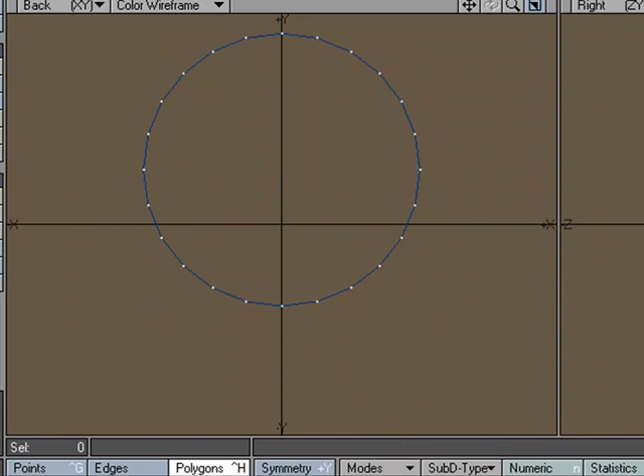I'm going to jump over to Modeler and build the basic building blocks, starting with the disk tool. So over in Create Disc, I'm just going to draw out a circle. I'm not going to give it any kind of depth, it's just going to start off as a circle.

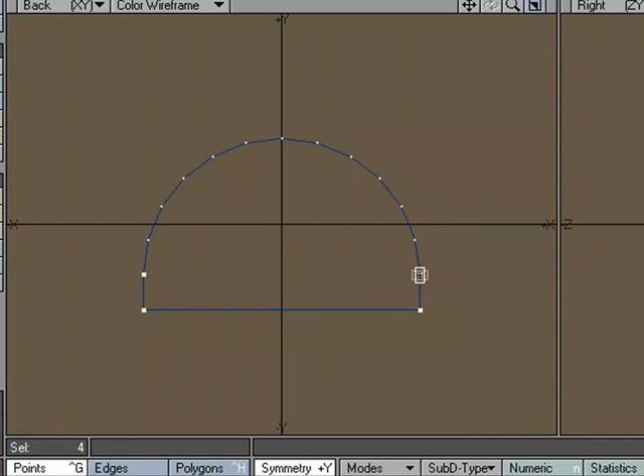I'm going to get rid of some of the points I don't need, down here. Hit delete. I'll go ahead and center it with F2, turn symmetry on, and then select these two points, which of course will be selected over here too. H for stretch, and I'm just going to line those up. I'm using the stretch tool to move these, but by having both selected, I'm stretching them in place. Let's zoom out a little bit and drag those down. So what I get is this nice tall wall and this arch. Just so it'll show up easier in this presentation, I'm going to shorten those a bit.

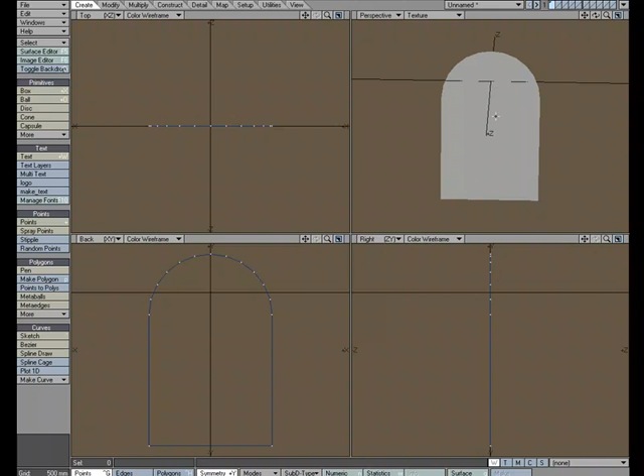So now that we've got our basic shape, we just need to give it some depth. I'm going to go ahead and select the polygon, not that you have to, but just so I can explain. Let's go full screen. When you're extruding, normally you extrude away from the polygon normal so the object isn't inside out, but we actually want our geometry flipped in this case.

So I'm going to go over to Multiply, Extrude, and extrude this out to get a long hallway. Let's take a look at this full screen in perspective, and now as you can see we're kind of in a hallway. There's no reason to build the outside thickness of the walls, we're just focusing on this.

Now I'm going to select this polygon, T for move, hold down Control to constrain it, and make this a little longer. We can always shorten it later. F2 to center, and I'm going to turn symmetry off, select all of the geometry, T for move, and I'm going to copy, paste, and move this over to here.

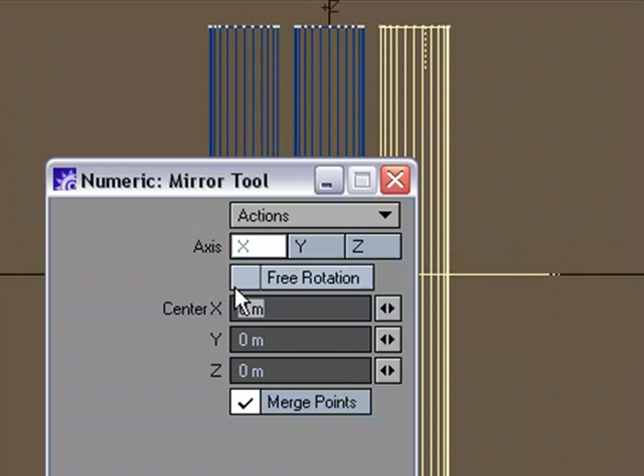Now I could copy and paste and move it over here as well, but to make sure it's the exact same distance, I'm going to use the mirror function, Shift V, N for numeric, and we'll mirror it across the X, with the center at 0, 0, 0. So now I have 3 identical little hallways.

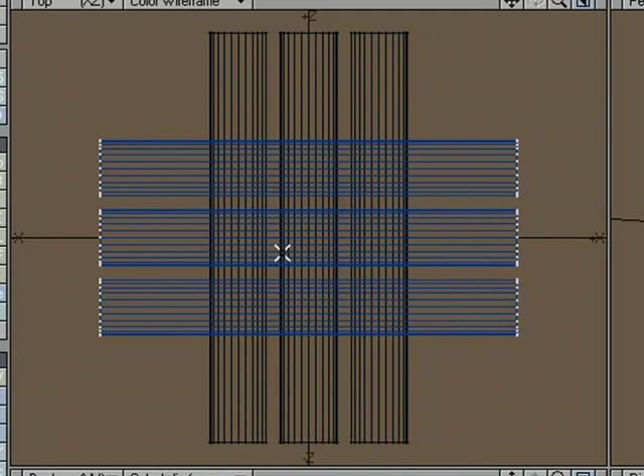I'm going to copy all of them and paste them into layer 2, put layer 1 in the background, and with my cursor right over the top view in the center, I'll hit R to rotate the geometry, then F2 to center it. Let's go full screen. So we've got these 3 hallways intersecting with the 3 hallways in the background.

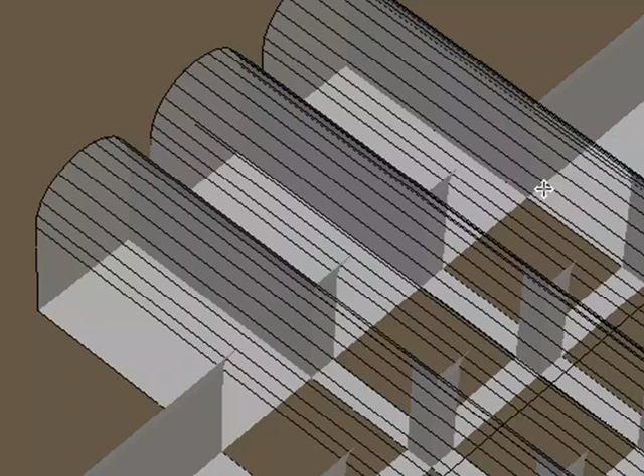Let's Boolean those together, let's merge them together. So Shift B, which is construct Boolean, and we'll use the union operation. Click OK, and let's take a look at what we ended up with. Now we can get rid of the floor polygons. I'm just going to lasso select those, hit delete, and let's take a look at what we've created. So we have the ceilings we were after, with these nice arches here, but let's dress it up a little bit more.

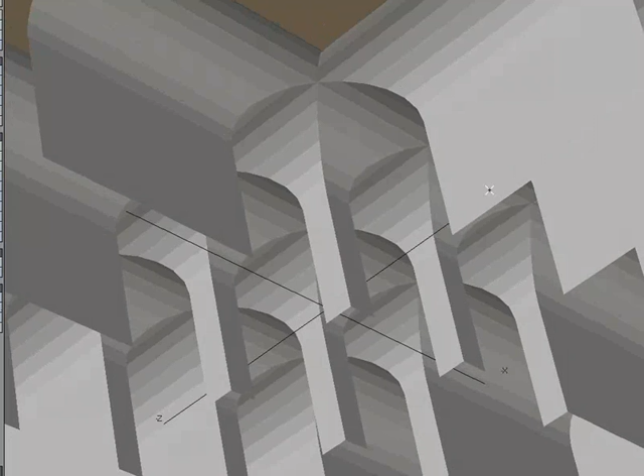Let's make it look a little better. First, we can turn smoothing on. I'm going to hit Q for change surface, and we'll call this stone smoothing, and keep it gray for now. Okay, and what I'm looking at is this really hard edge here. Let me zoom in—it's a really hard edge. I'm not really liking that, and I want to round that off a little bit.

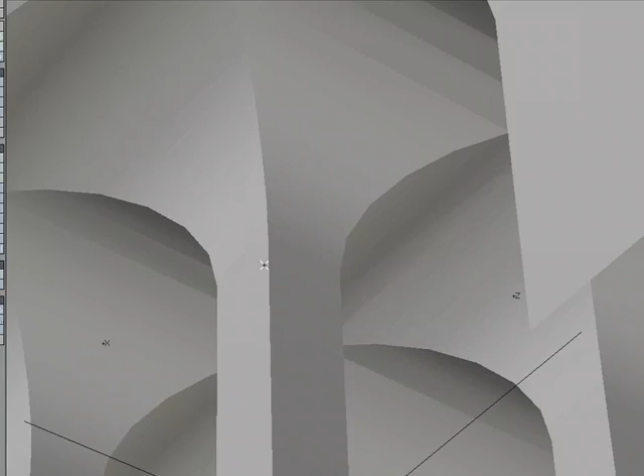So the first thing I need to do is, after I perform a Boolean operation, I really need to take the individual pieces of geometry and merge them together.

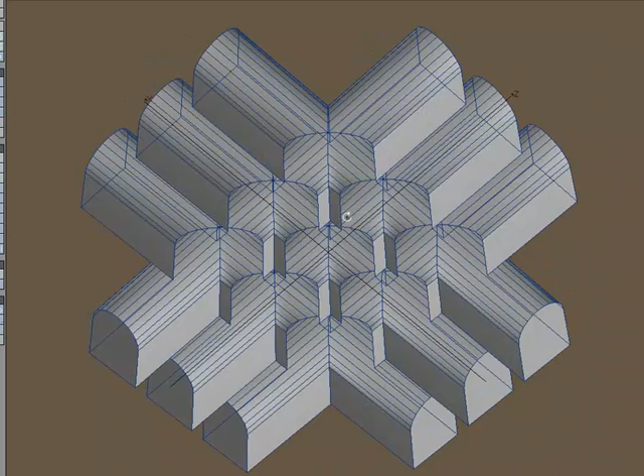I'm going to hit M for merge and get rid of the points that are right on top of each other. Now let's go into texture wireframe just so we can see, because what I want to do is round off these edges.

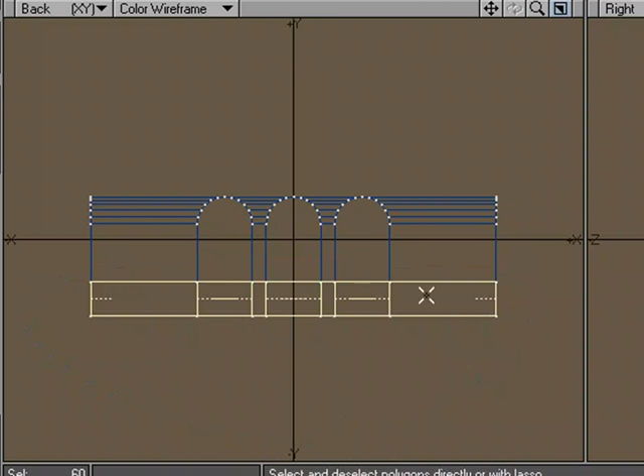One thing I have to know is when you have open edges, like on the bottom of this geometry, Rounder is not going to like that and it won't work. So I'm going to select all the points on the bottom, hit E for Extender Plus, and drag those down. All of this is just junk polygons that I'll get rid of after the operation, but this allows me to perform it.

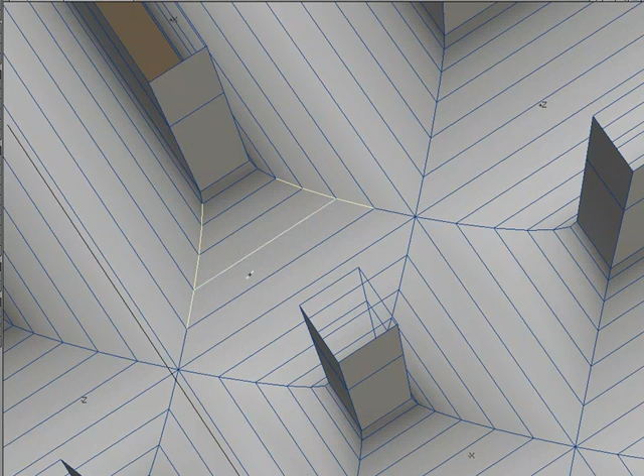The other thing I have to know is that I can't round all of the edges off at once, because if I try to round this set of edges and this set at the same time, let me zoom in so we can see, it would see that this point and this point make up an edge and try to round those as well.

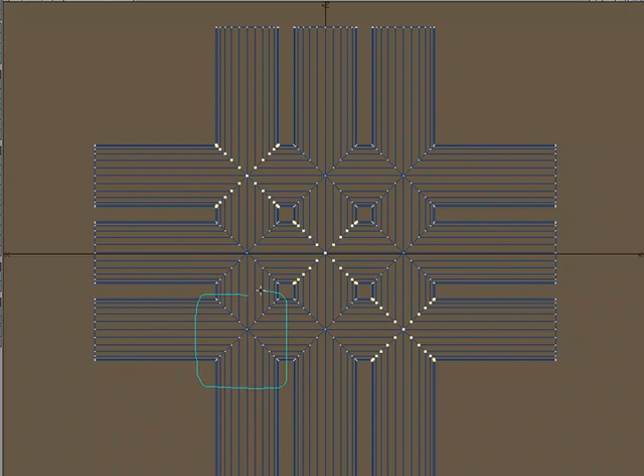So what I need to do is make sure I don't select two that are next to each other. I'll get this one, the one in the middle, this one right here, and this one, so I'm getting all of them except the ones that would be right next to each other.

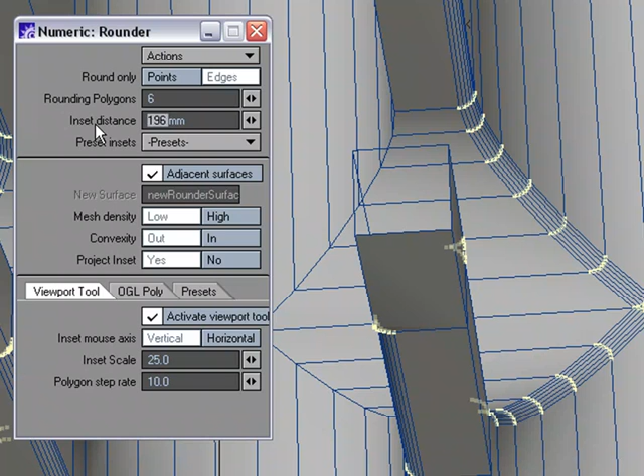Now I'm going to deselect these bottom points, since those are on the open edge. Let's zoom in so we can see the settings. I'll go over to Multiply, Rounder, hit N for numeric, and do 6 for the rounding, then increase these a little bit. Let's do a nice even number, 200.

That looks much nicer. Instead of this hard line, I'm getting this nice rounded corner, but I'm not finished, I need to do the other ones. It'll be a little easier to see which ones we need because this looks thicker, since it's got 6 polygons instead of 1 sharp edge.

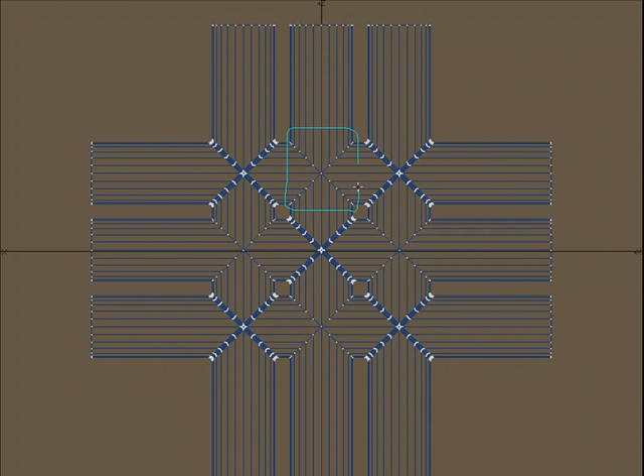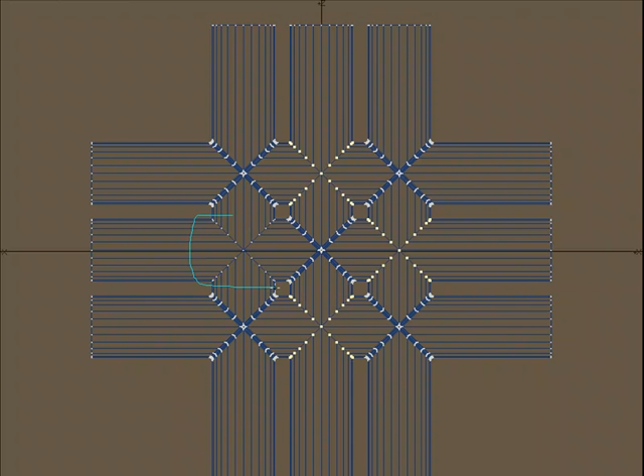So I'm going to lasso select, using my right mouse button, and just select the remaining areas to get rid of those. Remember, that's a big one, you don't want to try and round on an open edge.

We should be able to use the exact same settings, so we'll go over to Multiply, Rounder, hit N for numeric, and that should work. So we'll commit to that.

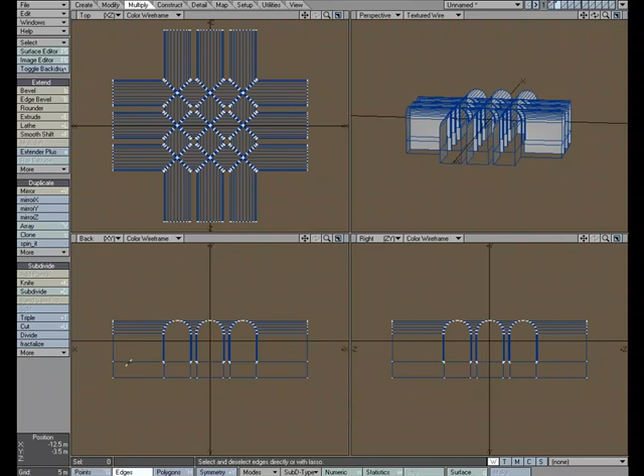Now all we have to do, unless you want to keep them, I'm not really liking the look of this, but it depends on the kind of pillars you're looking for. I'm going to remove all of this geometry, which will also reduce the small stuff down here, but that's what I want. Let's take a look, and now I have those ceilings I was after.

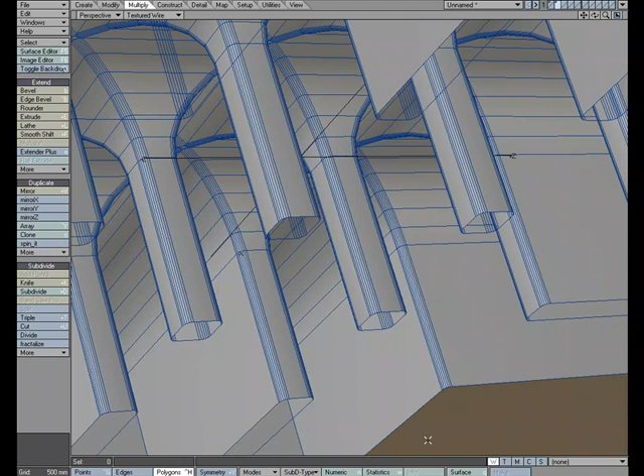And much nicer columns. Now if you want it to look more like the image we were looking at, all we have to do is raise the geometry for the columns up and build one of these pillars here. It looks like in this image we've got several different styles, but you can build as many as you want and tack them down here.

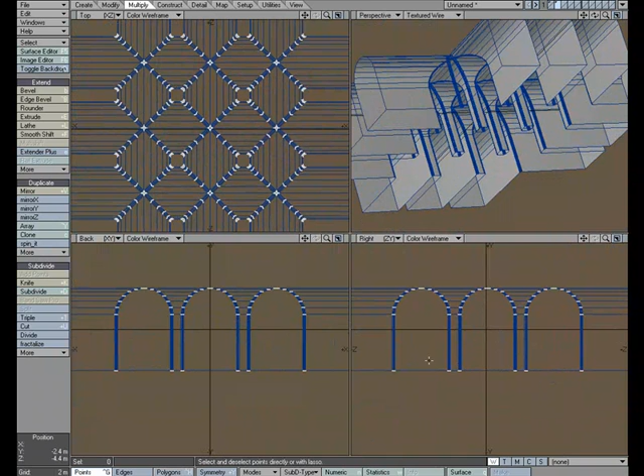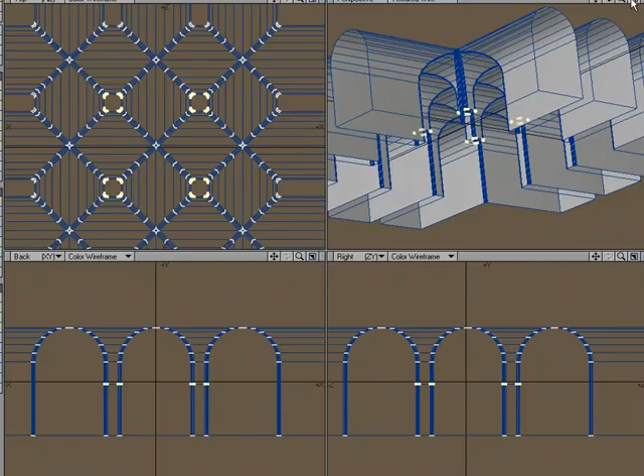So you would just select the points that make up the columns there, get rid of the geometry along the edges by lasso selecting it, and raise those up as far as we think we need to, cap them off, and build whatever ornate columns you want to sit underneath there.

But that's just a quick look. I've used this technique for years, like I said. Hopefully this will get you started, and you can go start adding more and more detail as you'd like.